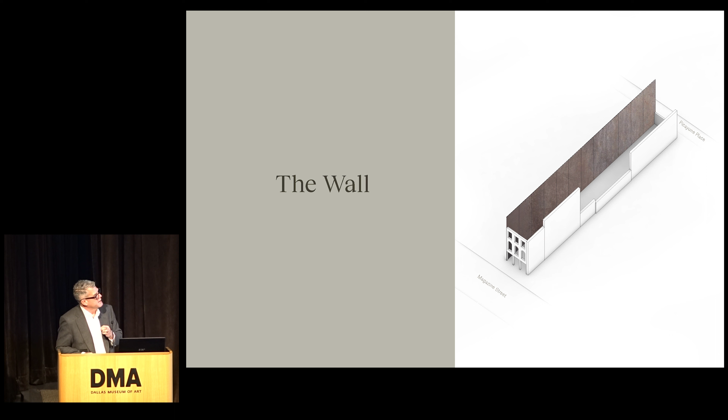Adjacent to this steel sculptural piece is the concrete box, a cast-in-place box that is 150 feet long by 18 feet deep, with a small 3-foot gap between it and the steel wall. Two floors: the first floor 15 feet, the second floor a 30-foot ceiling height. And in the section to the right you see the two sections, the steel wall on the left.

But it's about quiet and stillness, like the Japanese tea bowl. It's a radiant, heated and cooled structure, no ductwork. All lights are externally placed on top of the concrete structure, reflecting off the steel panels. At times it's about darkness, but also, as one Japanese writer said, in praise of shadows—how do we celebrate space and at times edit out artificial light.

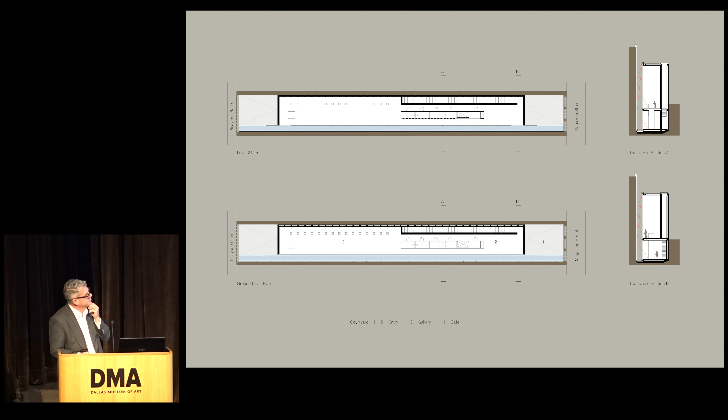So it's going to be about this art collection and about the uniqueness of this space in this urban void, in this place where 250 years ago a building burned down and left the remnants here.

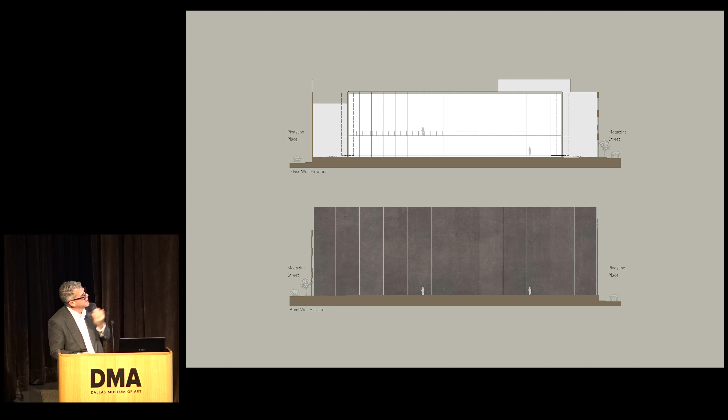Here's an image on the bottom half of the steel plates—you get a sense of scale. And then, of course, the glass box with two large doors on either end that slide, providing the means of entrance and exit into the building.

And then some of the spaces—this is the lower level, and then the upper level—just the beauty and presence of art in the space. The building would be used for community events, lectures, talks, social events, but also contributing to other fundraising events much needed in a city like New Orleans.

Another artist we collect is Genta Ishizuka. Genta won the Loewe Prize a couple of years ago. Interestingly enough, Genta was deeply moved one day while walking home from a grocery store. He saw an old lady with a bag of oranges in a net bag, and he was moved by the way these spheres move and relate to each other in the mesh.

So he purchased what he finds at times deplorable—these styrofoam balls—placed them in a mesh, began to paper mache them, and then applied 25 to 30 layers of lacquer, sanding layers as he moves through it, revealing a previous layer, creating these stunning reflective pieces that reflect space, where you rethink and reinterpret space because of their reflectance.

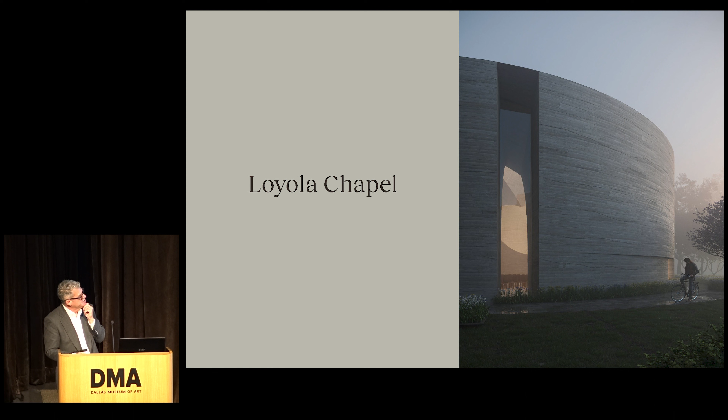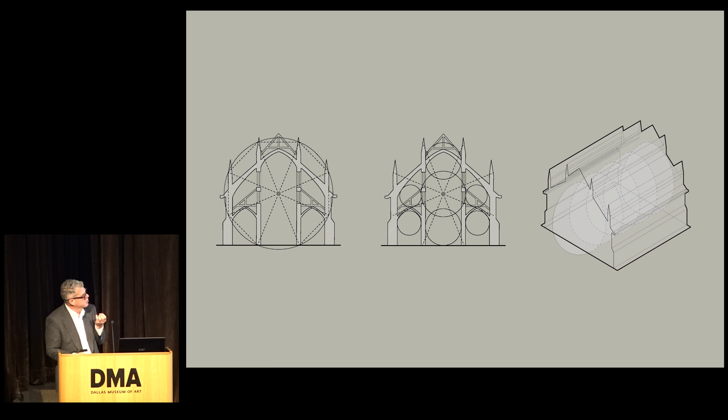And so as we begin the commission for Loyola's Chapel in New Orleans on St. Charles, we began to think about the history of the church, the chapel, St. Ignatius, these two interpenetrating circles and spheres, how the church and religious space has evolved.

We started by taking balloons, filling some with water and others with air, and watched as we poured concrete around them and these objects began to deform and shape. It was that element of chance we found intriguing, because in that subtle, nuanced deformation we find transcendence, mystery, something that touches us deep inside, something at times unexplainable.

We created a series of cast-in-place concrete models and fell in love with this kind of expression, because it felt like that kiln, that placement of something in fire with a high degree of unpredictability. And so we brought this into the plan.

How do we create, in today's day and time, this small chapel of a little over 4,300 square feet, spaces that are about equity, about community? They are not elongated, assigning a privileged position to any placement, but they are about gathering.

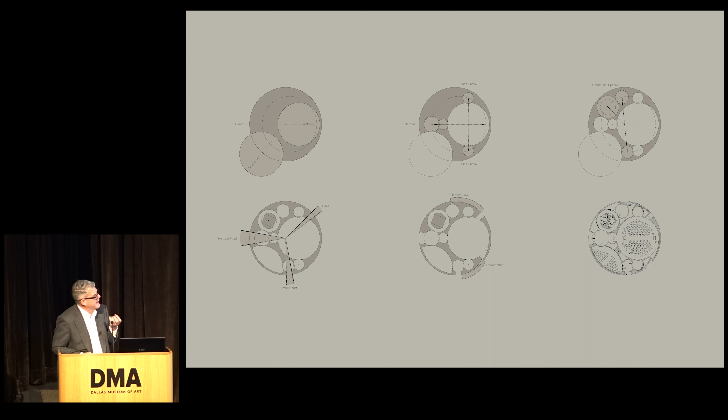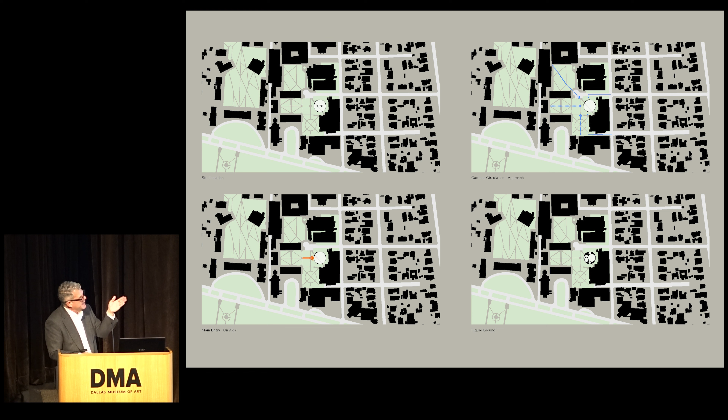We found that in these interstitial spaces between the cylindrical forms, we could embed program—reconciliation chapels, the sacristy, other equally important spaces. We placed it, as shown in the bottom left image, on an axial condition as you move into the chapel.

We're currently in construction and hope to have it completed later this year. It's a really small project. This gives you a sense of the campus, the neighborhood, the historic cemeteries, and the process of making and shaping.

It's at this point we begin to think that maybe our design process should begin with the end—meaning we should think about who's making these things, what craftsmen are out there, and how we converse or collaborate with them.

These are other pieces we collect—this is Koji Hatakeyama. Each of these artists is in a significant number of museums internationally. Koji works in cast bronze and makes these beautiful boxes out of it. He enjoys a high level of unpredictability, but then you open these boxes up and there's this exuberance, this surprise, this pleasant, unique space embedded in the cast bronze box.

As we were commissioned for the Louisiana State Museum, we were directed by the museum director to embrace the history of the Mississippi River pre-levee—developing a thorough understanding of how rivers deposit and scour, how sediments stratify, and how water at different elevations shapes the river differently.

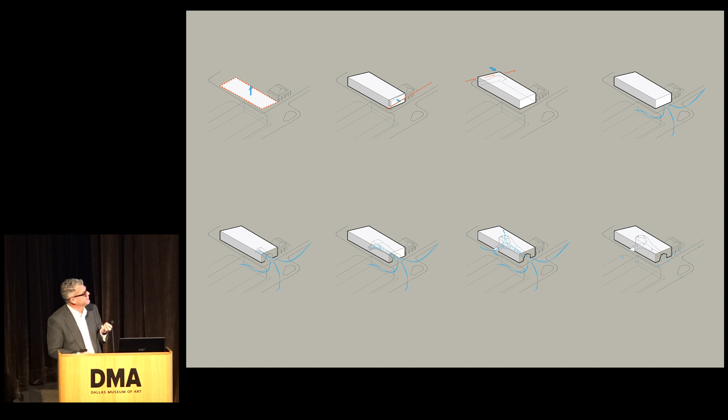We also embraced the plantation and the plantation shutter, so we began to build models. We started with the Fisk maps, shown on the left, which depict the ancient meanders of the Mississippi River over thousands of years pre-levee, then built 3D models and worked toward understanding how we could use this river morphology to connect to Natchitoches, Louisiana, the oldest settlement in the Louisiana Purchase territory.

We began to study different materials. We talked to friends in Zaha's office, and they said, whatever you do, don't use a massive material—use a thin veneer. This was many years ago. Of course, we rejected that advice and decided to build it out of cast stone. I think it's part of the culture of the firm, challenging the norm.

But it was about river morphology—about how you integrate two programs, one about history and one about sports.

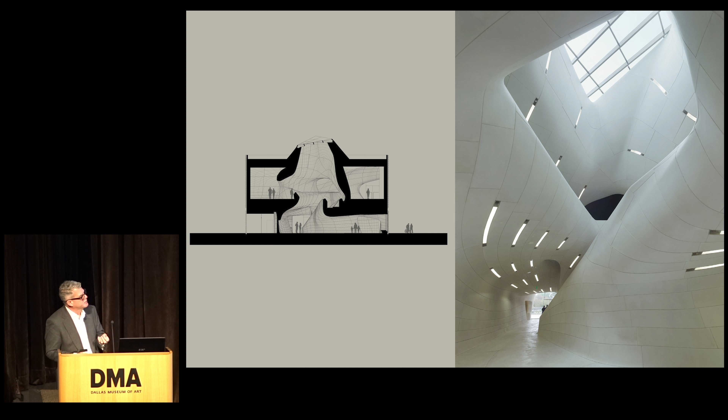At one point we had completed the model and the drawings, only to find out the fire marshal rejected it because a few spots where the sprinkler heads were not achieving coverage, so we had to begin again. We worked with a cast stone supplier out of Georgia, and we thought we were in budget.

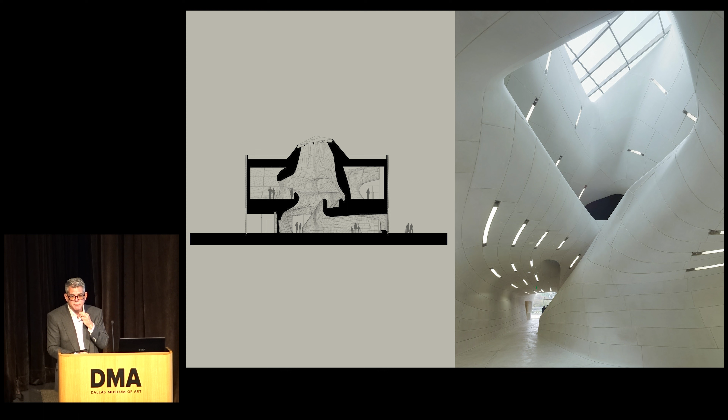Quite frankly, as we went through that process, they assigned a value per square foot to different levels of complexity. On bid day, they realized they were the only bidders and tripled their number, so the state of Louisiana looked at me and said, you're going to have to redraw it.

We found a cast stone supplier in Texas, not far from here, who had a dry cast stone process. We changed one line in the spec to include wet and dry cast stone suppliers, and the project came in on budget. The original sub that worked with us was high, and we enjoyed the privilege of a local supplier and built the building.

But it was about, to us, bousillage, that early product in Louisiana of how we build. It's the vertical image, which is clay, horsehair, and moss. For us, that rootedness is about how can we extract from place something that informs a way of building, of shaping, that creates spaces that may not be obvious to the eye initially, but over time you'll begin to make connections to how the earliest settlers built.

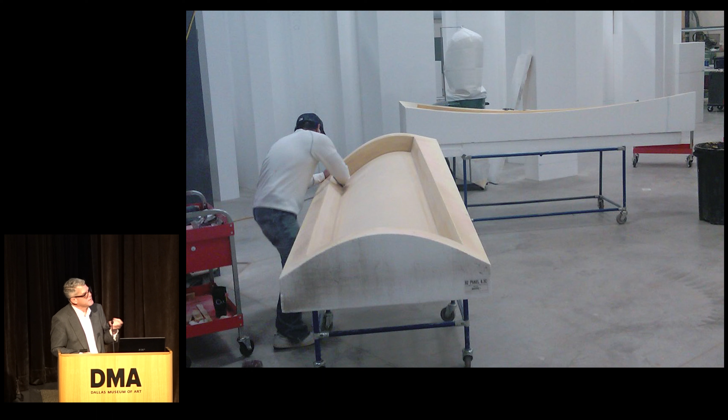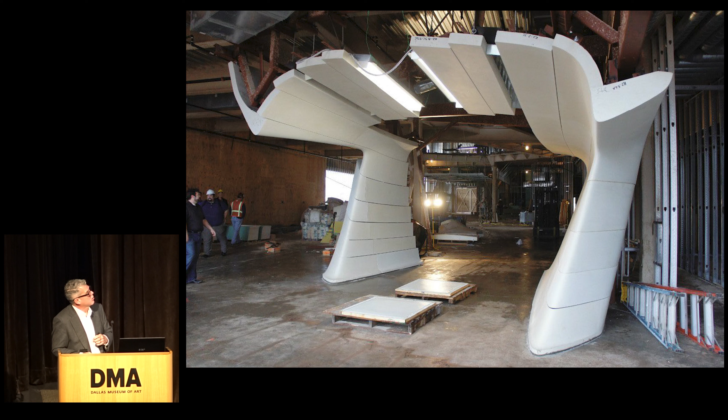There were over 1,100 cast stone molds, dry cast stone packed, 1,100 different shapes. Here's some of the earliest work. You can see a nominal thickness of 5 inches of the panels. With the 3D station, they maintained a 3/8 inch joint between these panels.

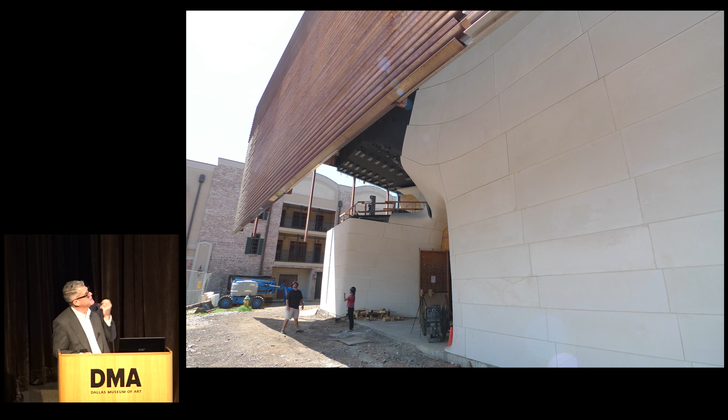The exterior was influenced by a lot of the historic plantations in New Orleans and throughout Louisiana, which are the shutters, the cypress shutters, and that operability. So we began to free them with these handmade, shaped, bent copper louvers that wrap around all sides and envelop this box. So once again, finding that cast stone box within, or shaped, sculpted space within the copper box, similar to Koji Hatakeyama's work. And then the copper is just aging and patinaing beautifully.

And here you see, even embedded in this facade is the jumbo door, which is used to extract or move artwork, large artwork, into the building, but you can't even see it. It's seamlessly integrated into the copper.

And then a number of other images. And then, of course, the front porch in Louisiana and the relationship of the porch to the river that the building sits adjacent to. Once again, the Japanese art of weaving, Boro textiles, are now what we're referring to as Japanese rural textiles, and the sashiko stitch, and that way of weaving something together.

So for us, when we were invited as one of 29 for the Alliance Theater in Atlanta, we questioned the budget. It was a new room with 650 seats for a little over 17 million. How could we build this space for that budget? Because they wanted something that they said was very progressive. They wanted it to be a room of tremendous warmth.

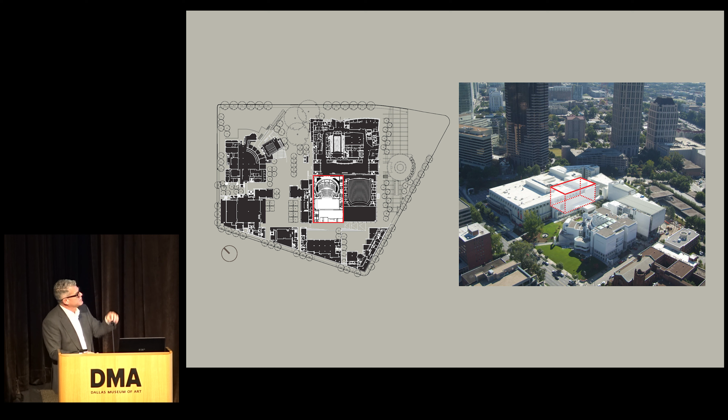And so we began the process studying Richard Meier's High Museum, Piano's Little Village. It led to a quick master plan, which then led to a comment by Susan Booth, who said, I would like the space, the room, to confront the inequities of a period in history when certain members of our society are relegated to the balcony.

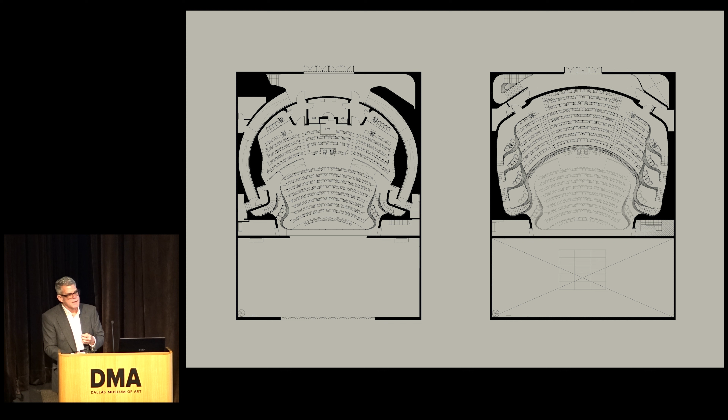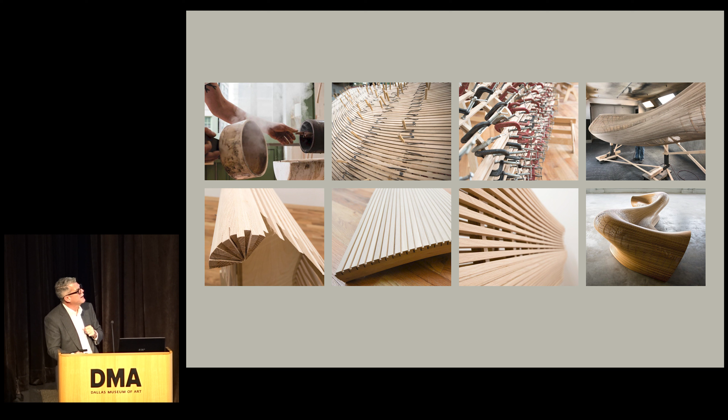And so we began to think about how do we create a singular community? How do we integrate the orchestral level with the balcony level, and what does that mean? We looked towards Matthias Pliszka, this brilliant sculptor in Brooklyn, who creates these beautiful benches, which is the lower image to the far right. We met with Matthias and asked if he would work closely with us.

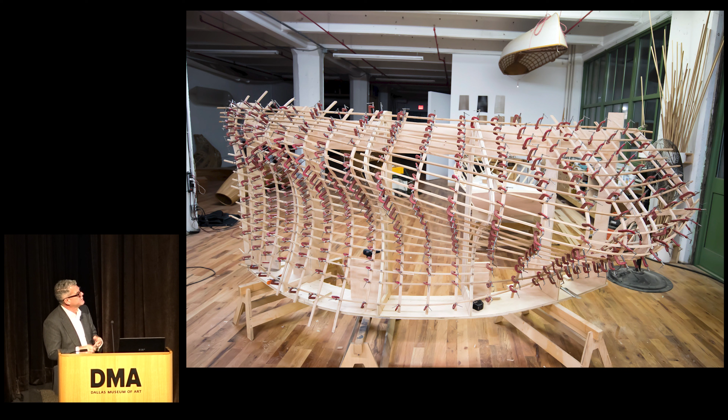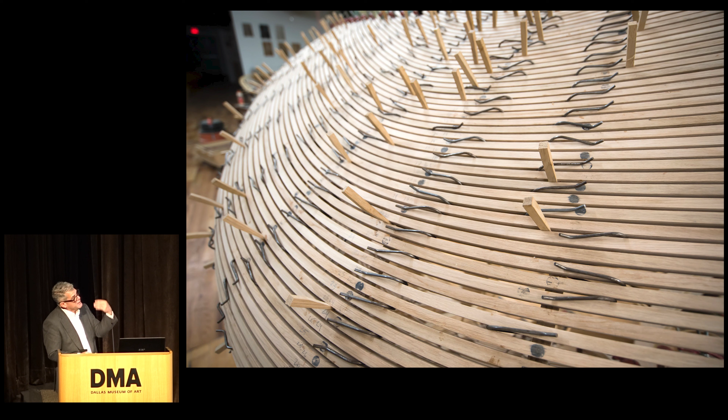And so we began to use this process of steaming these half-inch square reclaimed white oak members, and how we could shape it, and how it would begin to integrate the orchestral level and the balcony. But more than that, how it could become performative, how the convergence of these members would create solid surfaces to deflect sound, so they would be informed by the acoustical engineering. And when they diverged, they became absorptive.

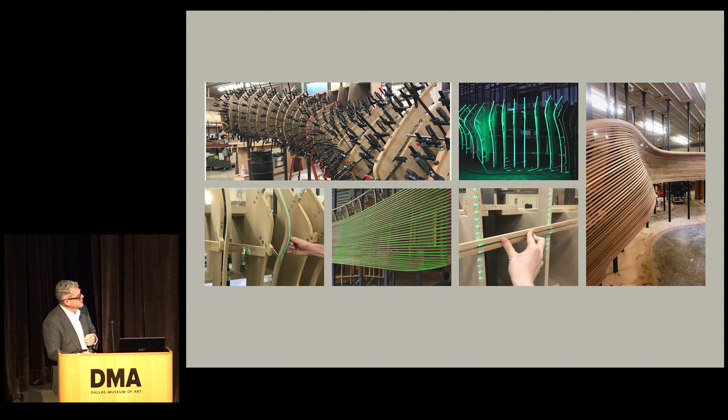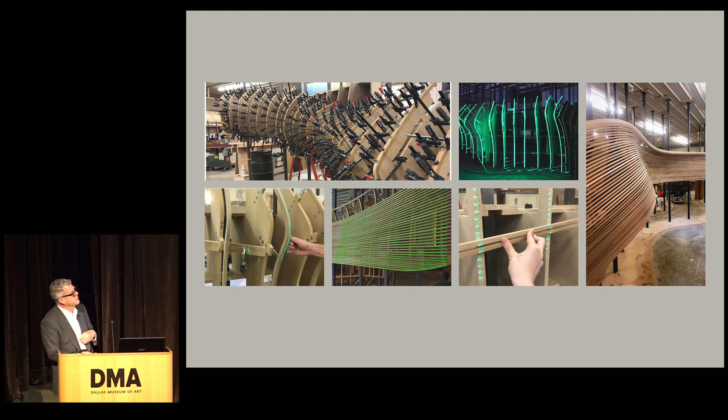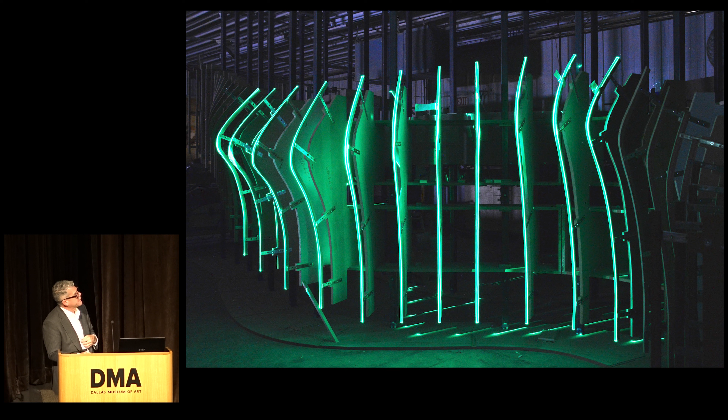And so we began to map these with the acoustical engineers. We used 3D laser strategies to place every strand in the room. The top image, second from the right, is where we're placing the ribs through the use of the laser technology. And then you can see how the artisans are beginning to place each of the members, on the lower image, in the space. So it allowed us in our 3D model to place each strand that we turned over to Keller to place them in the space itself.

Shozo Michikawa, another Japanese artist and one we collect. Shozo takes a block of clay and just delicately, with an X-Acto blade, makes around an 1/8 inch to a 1/4 inch incision around the block, places it on the wheel, and then takes a large dowel, at times almost a wooden member the size and cylinder dimension of a bat, and begins to force it down the middle of this block of clay, creating these beautiful, sculpted, unpredictable pieces.

And so as we began to work on Luther George Park in Springdale, Arkansas, we began to think of his pieces and how we could create an outdoor performance stage that was in some ways predictable, but in other ways, in our shaping, unpredictable.

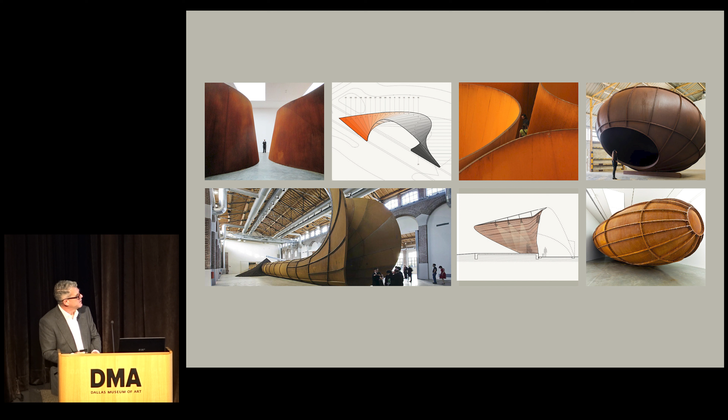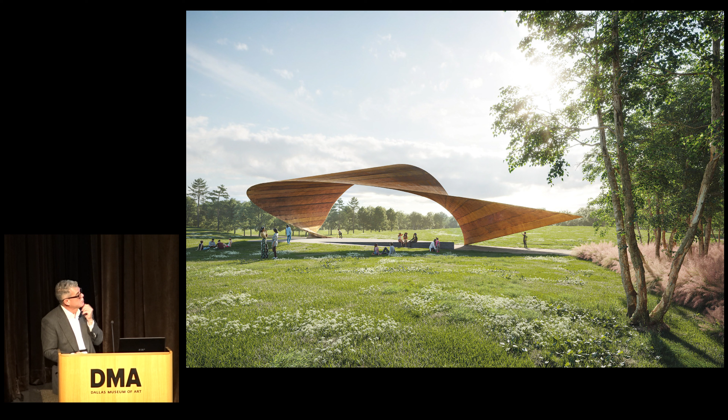We turned to CIG in Amsterdam, who are responsible for making a number of Anish Kapoor's beautiful pieces, and began working with them to shape the steel plate for this outdoor performance stage. A number of the plates are actually hand-hammered.

So do they follow the model? Yes, but not precisely, and we like that unpredictability in the making of these plates.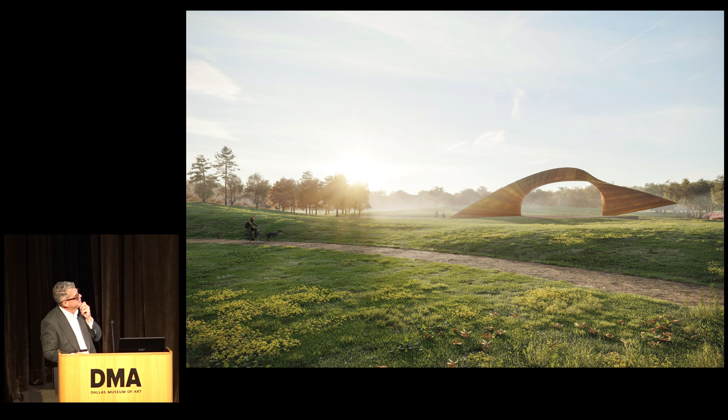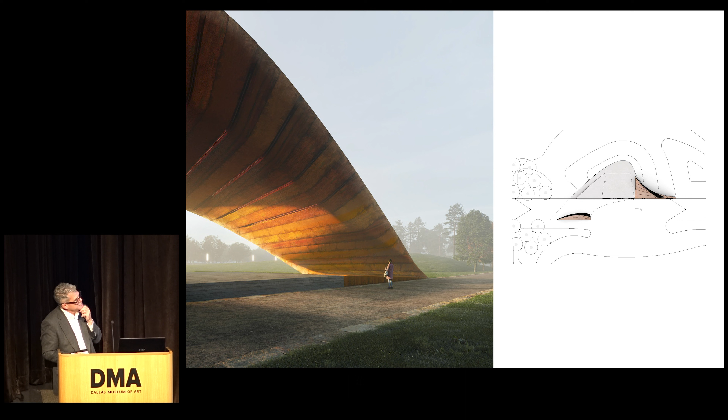So it's in a beautiful park. It's the archway, part of the threshold of entering the park, but it's also about performance exterior. The lawn seats about 2,000 people. Here you see in the middle of the image the performance piece.

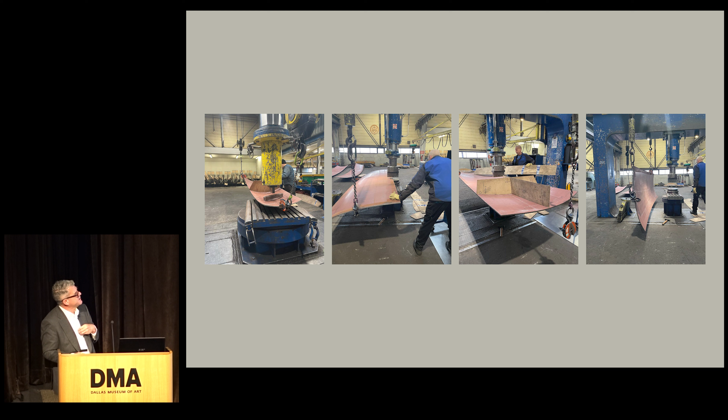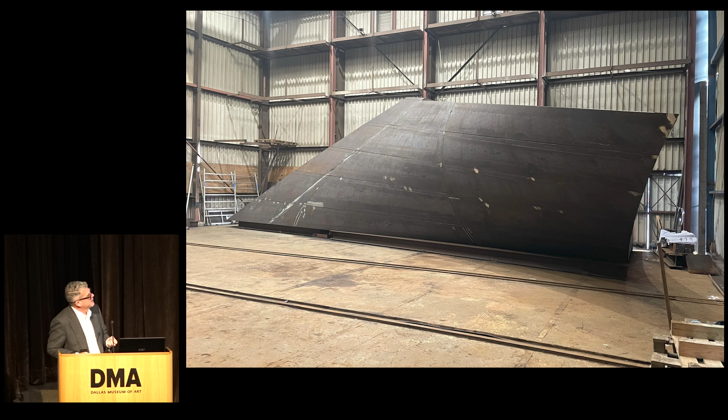And then recent images of CIG forming these plates, at times using some of our 3D models to etch on the back of the plates some of the moves. Here you begin to see these plates—something that really excites me is the size and scale of these pieces, the hand making, the hand shaping of these massive plates. And here you see at times grinding joints to meet tolerances, but you get a sense of the scale and, to me, the beauty of these steel plates.

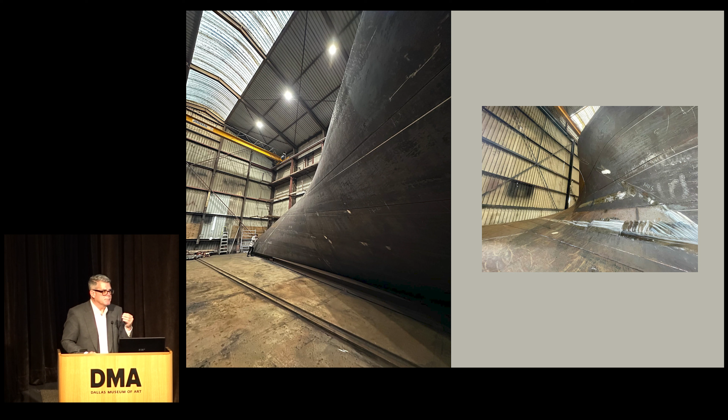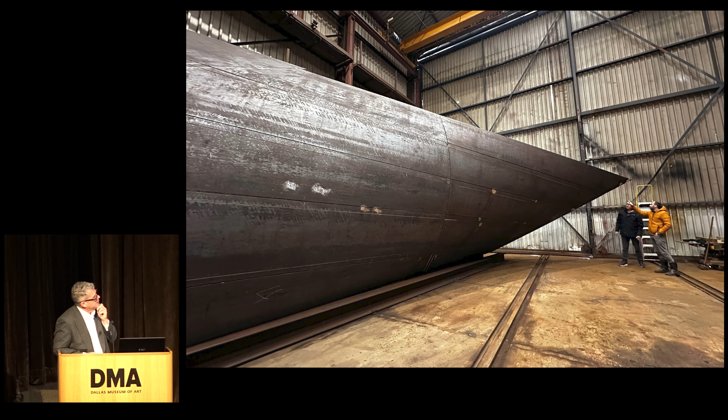As mentioned earlier, our work has been about moving from the platonic solid, the box, to degrees of deformation. I think it's something we're really challenged by, and at times we question it. I think we're moving more and more to subtle deformation—we find it far more interesting, far more beautiful.

And so we return to the Chojiro tea bowl and the way they make these tea bowls, the hand compressing, the shaping of the tea bowl.

Fascinating project. A gentleman walked into the office one day and said, I own a funeral home that serves the Black community, and I'm interested in conversing with this firm about what burial means in the Black community in New Orleans. We spent an entire year having those conversations about how the Black community celebrates life and what that means to burial.

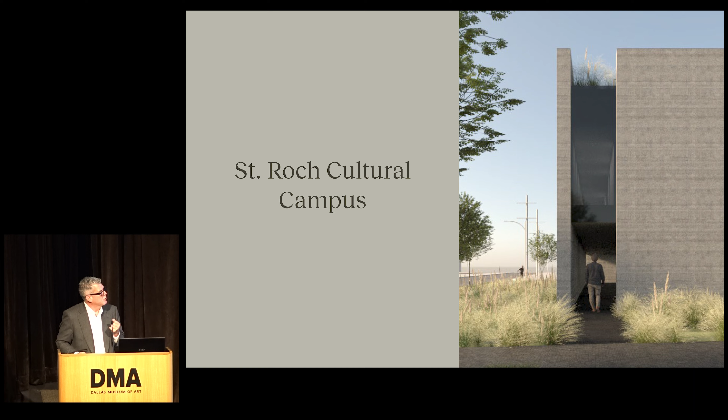He purchased an entire city block. He asked us to develop a deep understanding of the second line and to develop white papers on how New Orleans celebrates the neutral ground—that space now known as Canal Street, between the French Quarter and the American sector—through the celebration of weddings, Mardi Gras, but most important to him, burial.

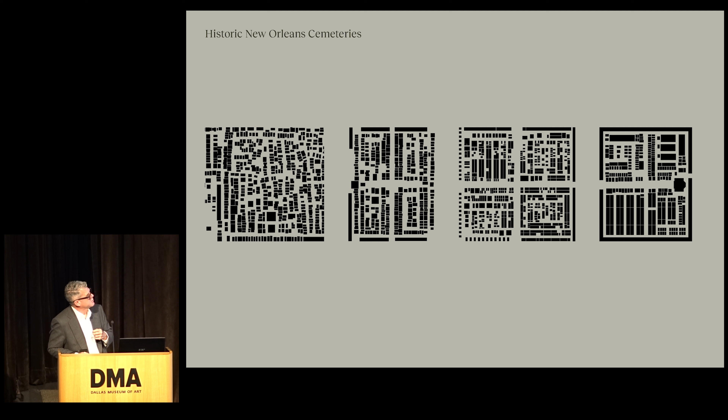We started by studying the different cemeteries in New Orleans and how they progressively moved from beautiful irregularity to more formalized, edged structures. The program includes the headquarters building for the funeral home, a large chapel, a small chapel, a crematorium, a horse and buggy with stables, and a museum paying tribute to the burial traditions of the Black community in New Orleans.

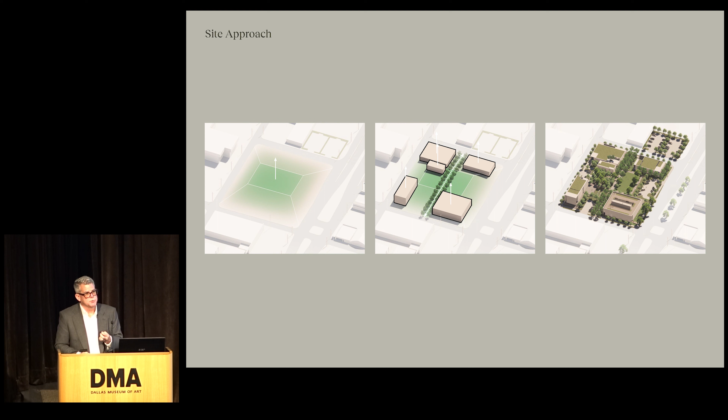This space was once a plantation—a flooded marsh with cypress trees. For us, it was about questioning that axial condition that set up the hierarchy or privilege of the plantation home, and using it instead to connect the site to other assets throughout the community.

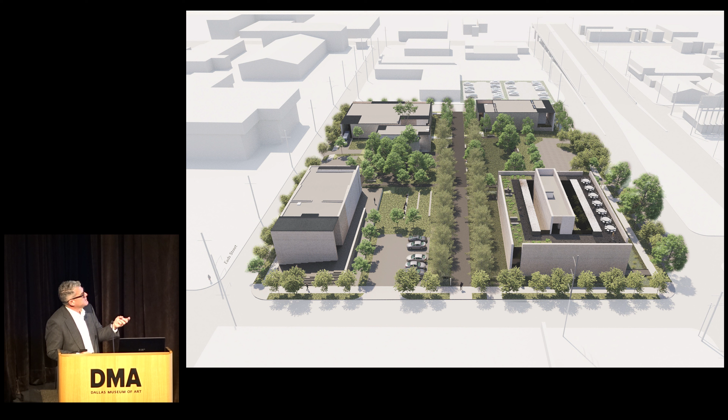As burial takes place throughout the site, the second line will meander throughout this community, hopefully reinvigorating the poor St. Roch community.

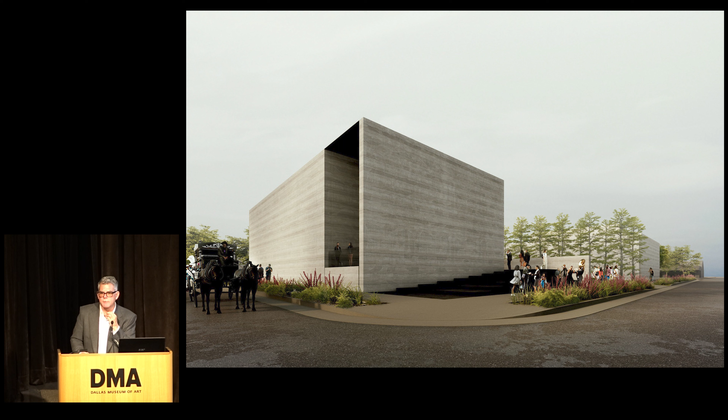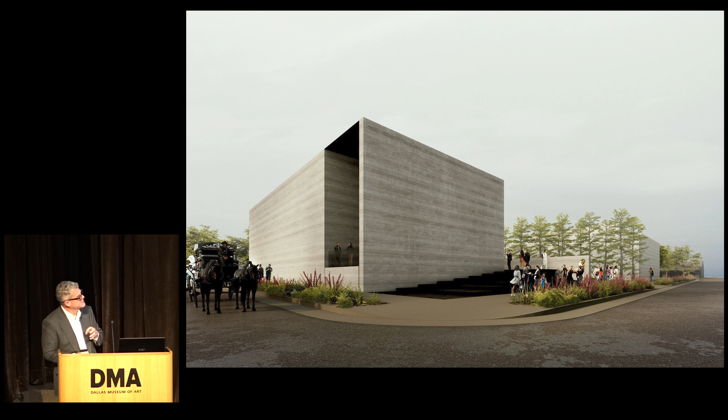We've taken another year to develop a thorough understanding of how to build rammed earth in New Orleans, a climate with 60 inches of rain, and we finally figured it out. We just produced 5 successful cylinders ranging in compressive strength from 2,700 to 5,000. The mix is 5% cement, 65% sand, and 30% silt.

So we will construct these series of buildings with rammed earth, a unique technique for New Orleans, but we're also returning to buildings that are about quiet and stillness, celebrating life in a way devoid of certain decorative elements that the firm finds to be distractions. For us, the beauty is in the materiality of these walls.

A few years back, we formed Designing for Democracy, a 501c3. It does most of our research work, which has gotten really extensive and expansive, quite frankly, and I hope it's informing a more authentic response.

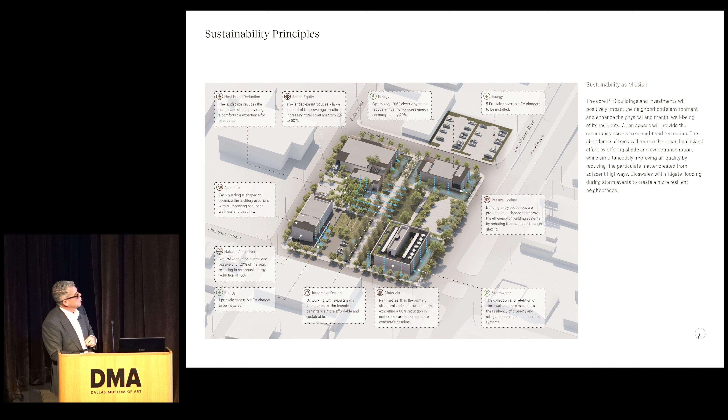On sustainability principles, we're working with SCAPE, which has a New Orleans office, on a number of strategies here which we think will be effective and contribute significantly—rooftop gardens, outdoor performance spaces, bioswales, but always centered on the beauty of the rammed earth and the structures.

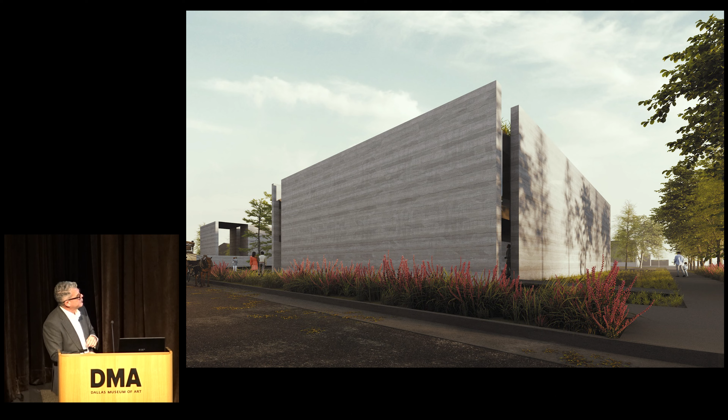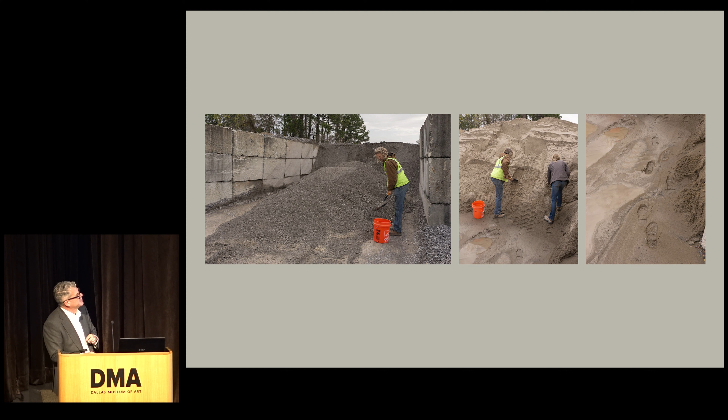Most of the material has been retrieved within a 15 to 20 mile radius of the site, and here are images showing the process of retrieving these materials, rethinking rammed earth as part of the design.

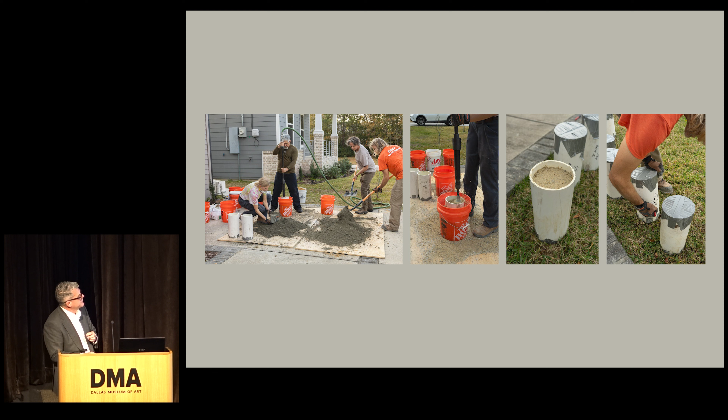It's made of sand, silt, and clay. Here we see the placement of some of the aggregates and the cylinders, and the most recent cylinders, the four to the right, passed the compressive test.

So Osaka was a really interesting project. We're part of Brick and Wonder in New York, and we received a call one day asking if we were interested in interviewing for the Osaka Pavilion representing the U.S. We were told they'd call that day around noon for the interview.

They didn't call, and I was home that evening when Richard Mulhern called, which benefited us because I didn't care to talk about architecture that evening. As the conversation developed, all I talked about was Japanese art, the beauty of chance, and the beauty of their pieces. At the end, Richard said for the first time he'd interviewed an architect who never talked about a building, not one of his buildings, not about building at all, but about shaping and making other artifacts that touch us in meaningful ways. Admittedly, I talked about the tea bowl and spoke of its beauty as a rare art form that touches the lips and nourishes us.

So we were selected two weeks later, developed a sketch, but began to think about who we are and where we come from, and what that means in Louisiana. All these axial conditions, these plantations that tee up the privileged position of the plantation house, and what that meant to rethinking an invitation to the world.

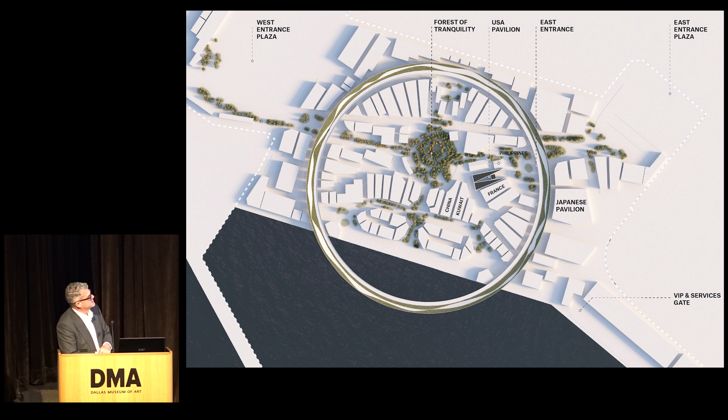To the right is the image of the building we'll start construction on in about 60 days in Osaka. The U.S., as you'd expect, enjoys a privileged position relative to the east entrance and the Forest of Tranquility. The two black wedge pieces with the suspended cube is the design that the State Department and Ambassador Rahm Emanuel have approved.

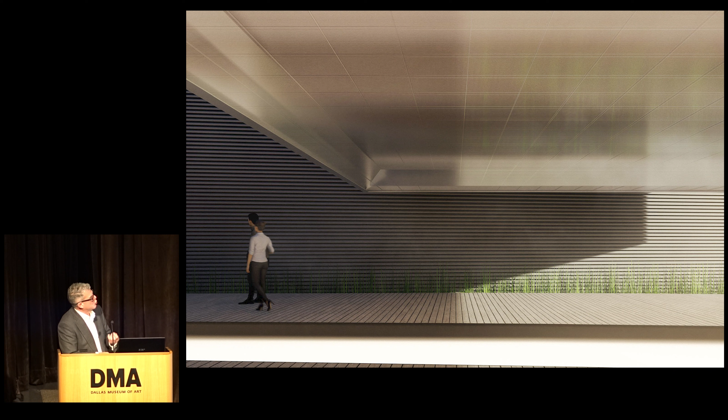It's the convergence of these two planes, so the invitation is to the whole community. But as you move inward underneath the cube, you're reminded that you're one, and you're held accountable for your personal contributions to society. There are LED screens on both walls depicting images of the U.S., from urban canyons to natural canyons, to this floating cube that will house some of NASA's most interesting discoveries and technology.

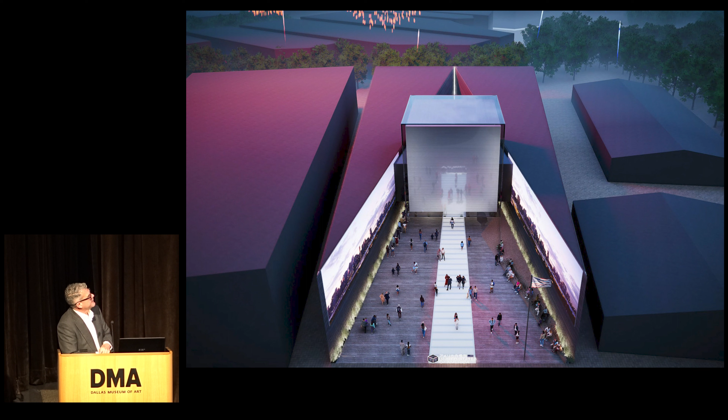It was a very unique commission for us because we're about materiality and permanence, and this is about a $50 million investment that will be dismantled in six months.

What was really exciting to us from a sustainability perspective was that ESG, who we brought in, had constructed a number of venues in Tokyo at the Olympics, and were able to provide us with dismantled kit parts for the structural systems that we would reuse for this.

Now, most if not all of the projects I presented earlier are really hard to make money on, right? In fact, you have to be asking how are we not bankrupt. I think it's because our business strategy every few years is to identify a rather large commission. We were selected for the Superdome, a $250 million project after Katrina.

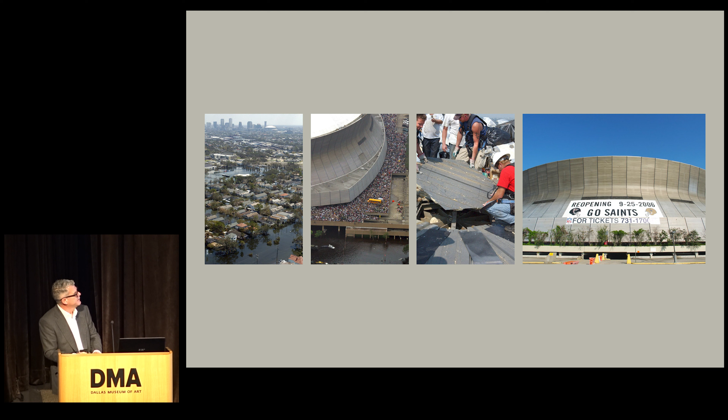It's a 2 million square foot building with a 9.8 acre roof. You're familiar with the images of Katrina and its impact. It was quite a fascinating project, but it allowed us to develop a deep understanding of the importance of this building in this community. It really is the living room for New Orleans.

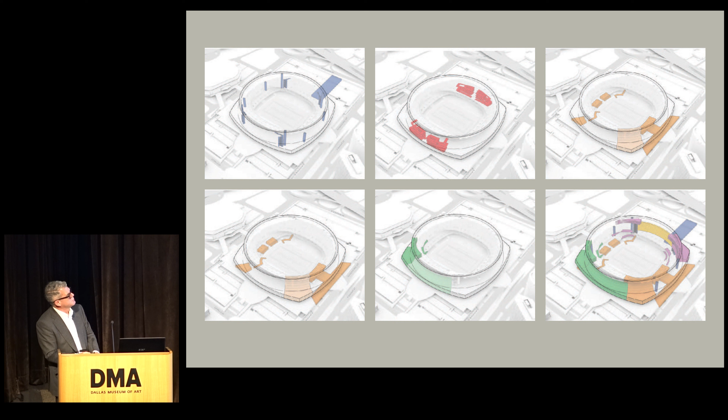With that, we began to sculpt and carve in the corners these massive atriums that go from the bottom of the gutter tub to the ground level. Here you see these massive spaces that at times peer into the volume of the Superdome, a building that will be 50 years old next year as we celebrate, as Nate mentioned, the Super Bowl, a building that's on the Historic National Register.

It's these types of projects that eat up an enormous amount of our staff, but provide us with the financial security that allows other members and teams in the office to pursue the work I presented earlier.